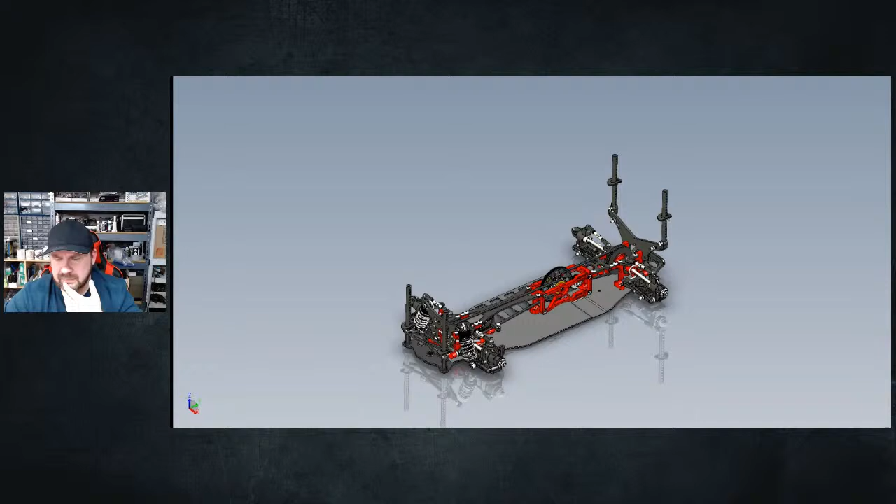Today I'm going to show you the prototype from before I started. I think it was 2008 that I started running for T.O.P, and I don't remember the name of the car that we started with, but that's what we ran at the Carpet Nats in Omaha. I wound up blowing up a lot of rotors in modified and finished last, I think.

And the 13.5 went well, and we wound up TQing and winning that. This car was some CAD that they had sent me after that race. I don't remember exactly when it was, but I know we were at a race talking about it, and Vincent and EJ were there, and they sent me the CAD model to check out.

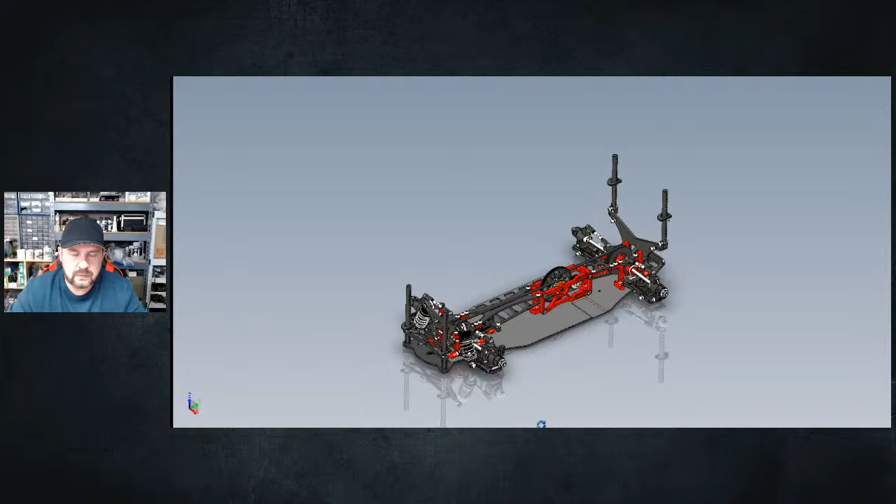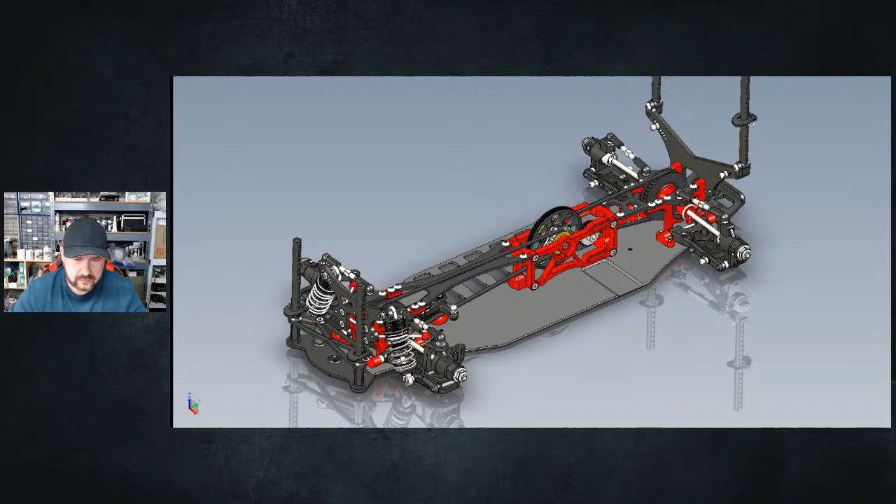I have to apologize, my normal Spaceball doesn't work with this e-drawings format, but this is the only format I have this in. I don't have this in a CAD model, so I can't upload it. Like I said, this is a prototype that was never made, but this is kind of the precursor to the Photon. Actually, it's kind of funny that it looks more like the cars do today.

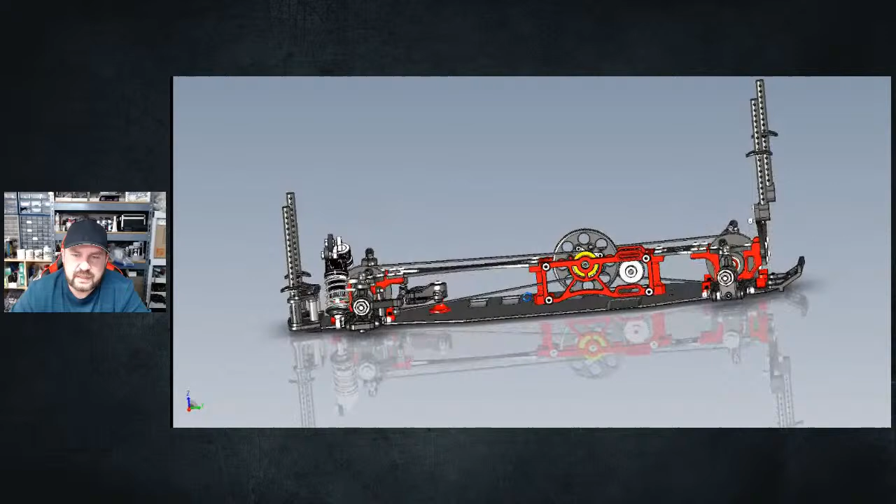The one problem we had with this car at the time was because of the way this whole center section was made. Mind you, I went through this CAD and assigned all materials and everything, so we could get a pretty solid estimate on what the weights were. The one problem with this car was with this giant mid-motor mount type setup, it was extremely heavy.

Also, the other thing we were looking at is it covered a lot of area for flex, so the car was going to be pretty stiff.

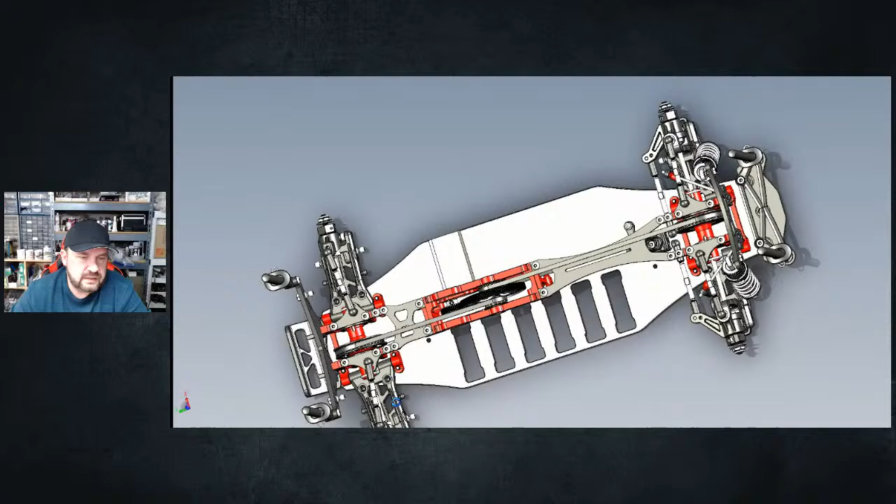But you can see a lot of common things, like the style the suspension arms were made out of, front and rear. I tried to emulate that when we designed the Photon. They really wanted a single crank, even though I had pushed pretty hard for a dual crank system, which is kind of funny seeing that everybody's going back to it now.

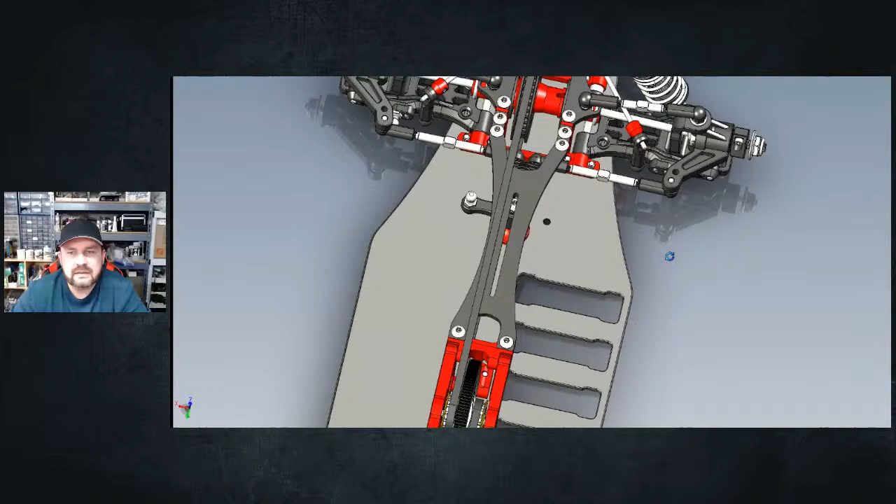But again, you can tell it's an older car style. The servos were being mounted the opposite direction compared to today's cars. I also had the style with the shock towers on the opposite side of the shocks compared to most cars, just to open up some of that area. But there were small things, like only front wheelbase adjustment, no wheelbase adjustment in the rear, just a bunch of little stuff.

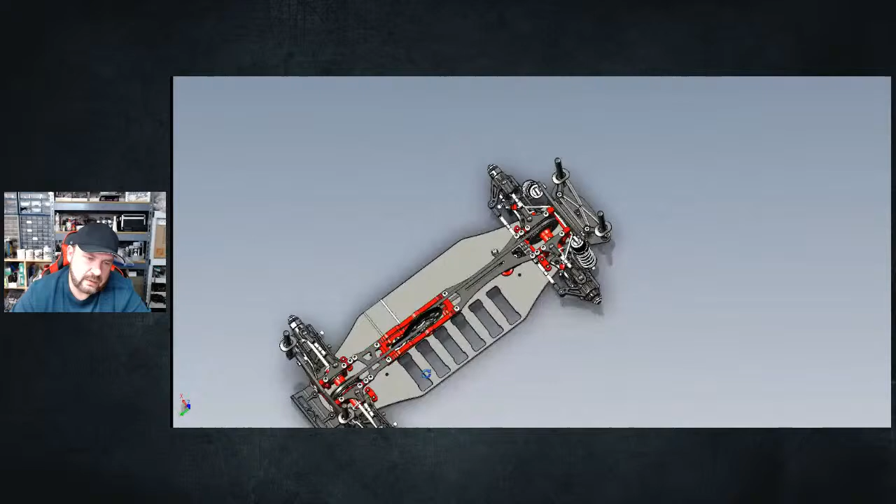So as we discussed it, they decided to have me redesign the car, and that's kind of where everything progressed from there.

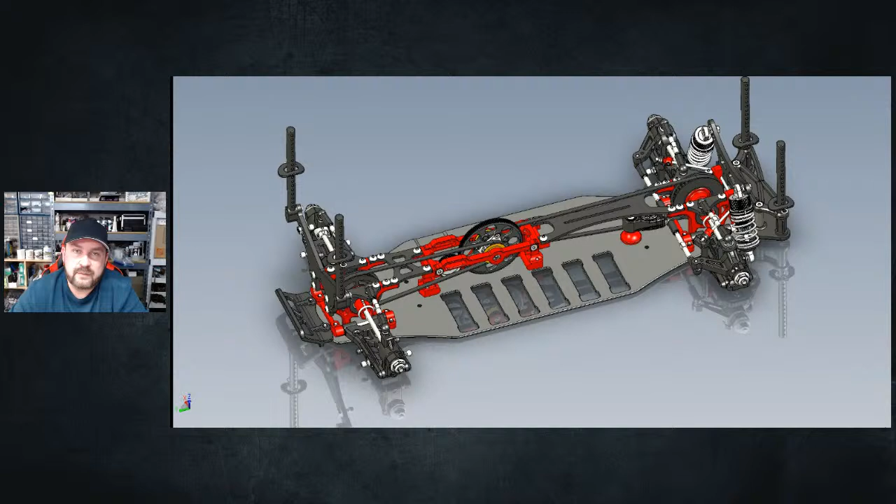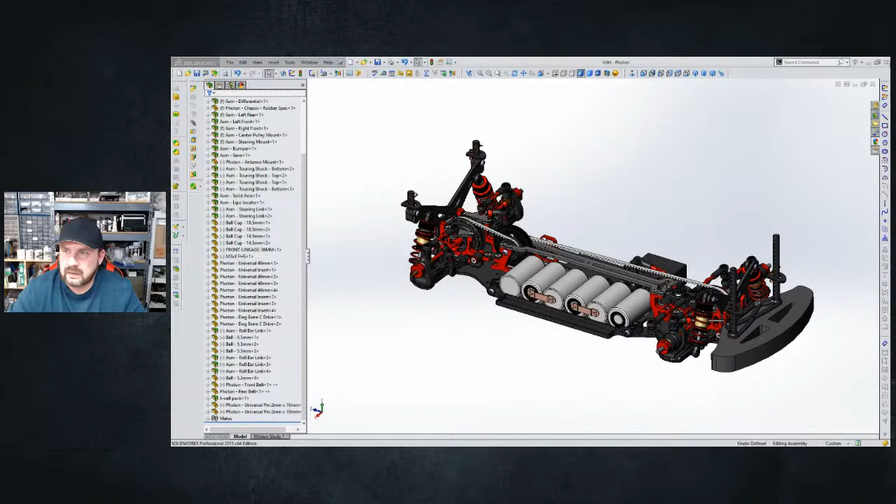Let's see, I'm going to switch over now to SolidWorks. All right, so this was the original Photon. I'm going to close this one too.

The deal behind this is you can see the previous car. The main thing I basically did was take that previous car, and at the time we were still using round cells, Lipos were just starting to come into the mix. But the big thing is that we were still split on tires. The US was still racing on foam tires at this time, where on asphalt we were running rubber tires, but the rest of the world was on rubber tires. So this was kind of a hybrid car, if you will, to try and give us something to race both, to where we could have success in both areas.

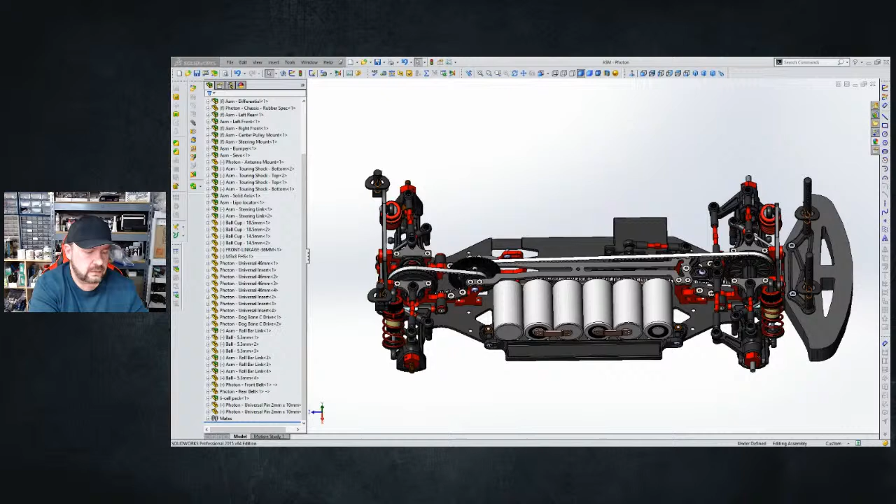And the first time we actually got to run production cars was at the Reedy race. I think E.J. Evans wound up winning, I think it was USGT. He sent me a note on what it was, it was 13.5, and I think whatever they were calling the USGT class. So we had a really good outing.

I had some decent races. Actually, it was kind of funny because one of those popped up in my YouTube feed the other day where Lemieux crashed at the beginning and Howard and I beat on each other, and he caught up and beat us on the last lap. Pretty funny looking back on everything that long ago.

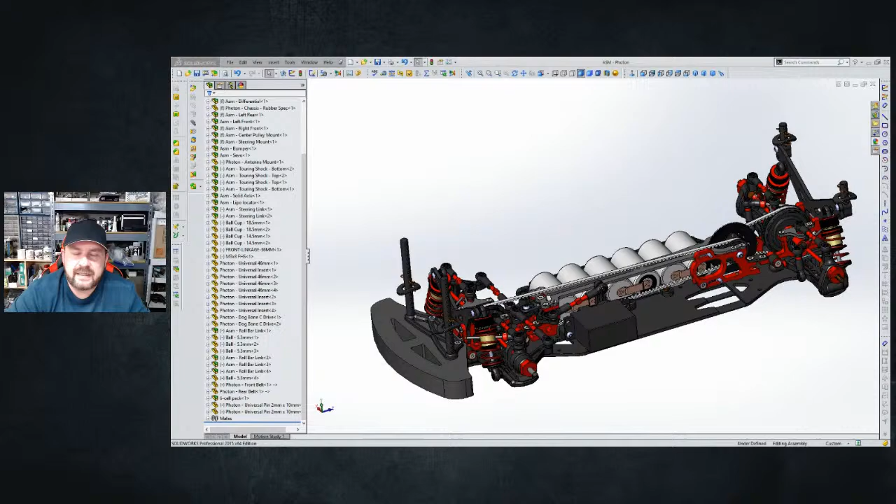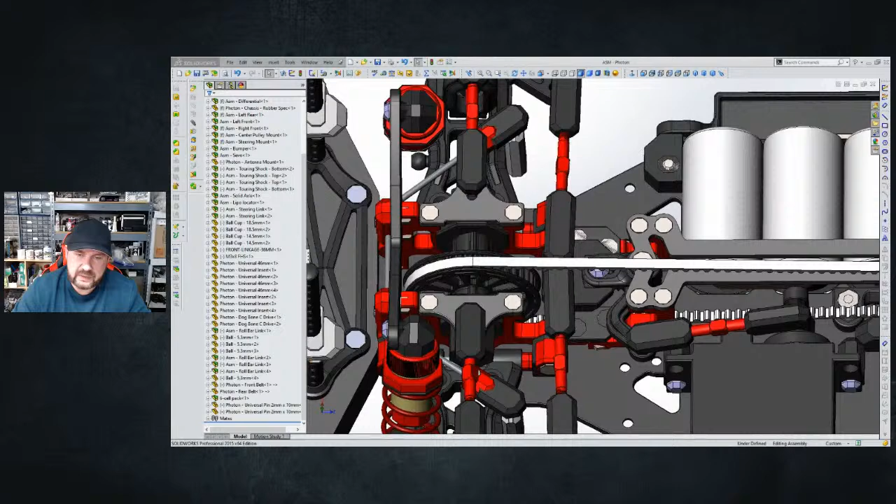At the time, we had gone away from the other style suspension mounts and went more the X-ray direction, which was so popular for carpet racing. We were trying to cover a lot of the chassis with bulkheads and optional pieces, to where we had these two small separates, and then one that would join, and one that would join and come out with ears to stiffen the car for foam tire racing. So we were trying to have a bunch of those options.

This whole weight tray wasn't used for round cells, but we were using them for lipos to be able to drop some weight in there to balance the chassis, at the time.

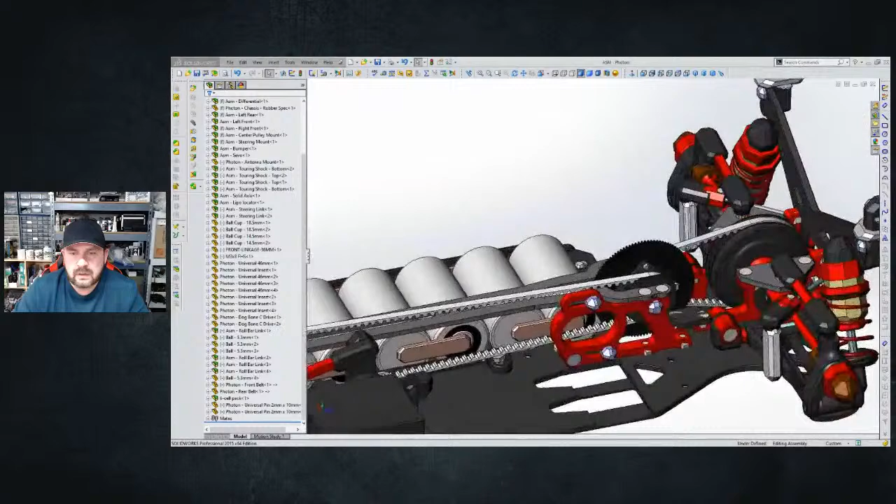Of course, ball differentials with the sealed up snap-on covers.

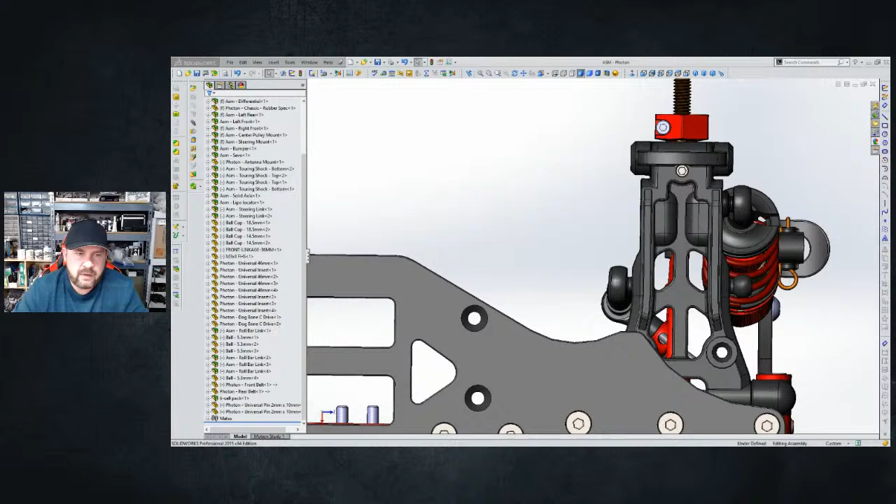I wanted to do the rear arms and hubs a little bit different to make them stronger, because everybody was taking this back section of the arm and having to scallop it to tuck the rear suspension arm, or tuck the shock in, so we weren't dragging on the rear wheels. So I kind of inverted the hub and the rear suspension arm trying to make space, so we could still have a nice, stiff, solid suspension arm, but narrow it all up so we had more room in this area, so we weren't hitting the inside of the foam tire rims, where we always were grinding grooves in the shock cups.

So that was pretty much the gist of this car. This car got ran. I had a prototype for maybe 8 months or so. I went over to a Hong Kong charity race where we ran over there.

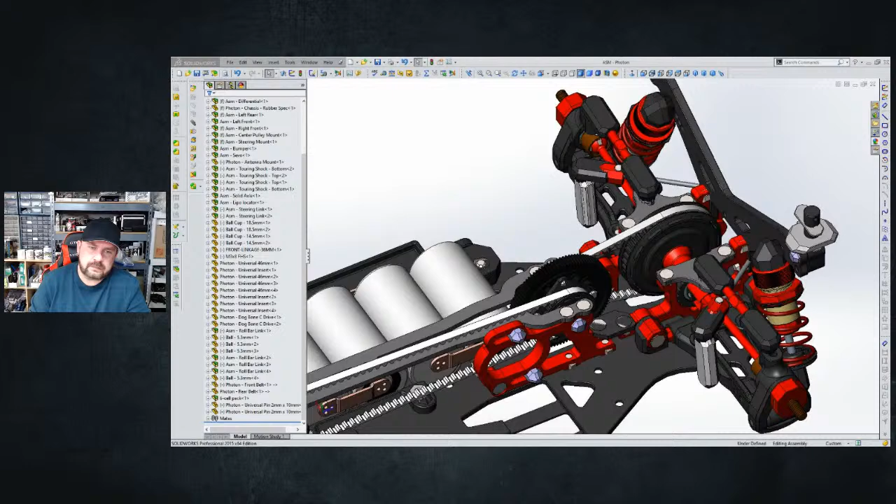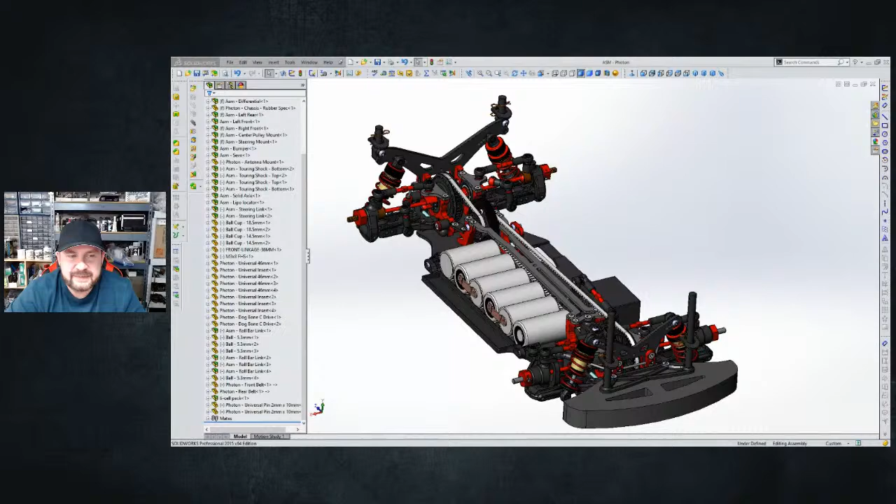I think Hanulik and a bunch of the guys started running it here in the U.S., and that was my first meeting with Hanulik and a bunch of the other guys there. I don't know why I'm drawing a blank on some of the names, but I'm getting old, so it is what it is. But that was pretty much it.

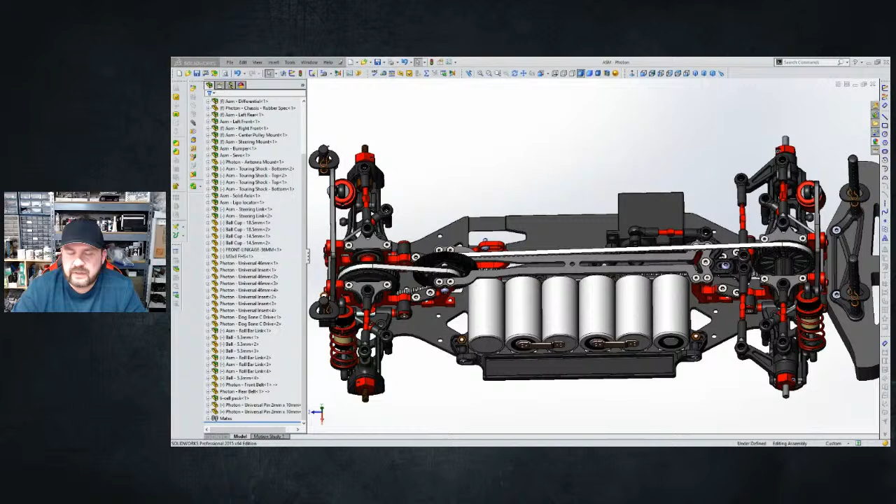So this was kind of the first version of everything. Looking back on it, it's pretty funny to see how much things have changed. This at the time was pretty standard, I wouldn't say run of the mill, but it had a bunch of different stuff on it, fairly typical for a touring car. Now they've changed a ton, obviously, in the last 13 years since I drew this.

So this car was at this point when we started production, and we had run for a little while, and I actually have 2 other versions of it. There was another car that I had already started working on. By the time this got out and people were running them, I had already worked on a second version, an Evolution 2, with a bunch of tweaks and changes, trying to further improve the car without making massive changes.

And that car is more a mix, I would say, of a pretty good selection of option parts. So that was one of the things I had.

If I come back into my files here, we had a ton of different option parts with some different chassis, all the different weight plate sets, some of the lipo weights that we had made. I even drew up front one ways, and then just a bunch of different aluminum hub carriers, steering blocks, kind of the adjustable body post cap, like the one we made for the 12 scale car, but made for the touring car size post and pin, so a little bit bigger. I don't think that was ever made. Some of this aluminum stuff might have been made at some point.

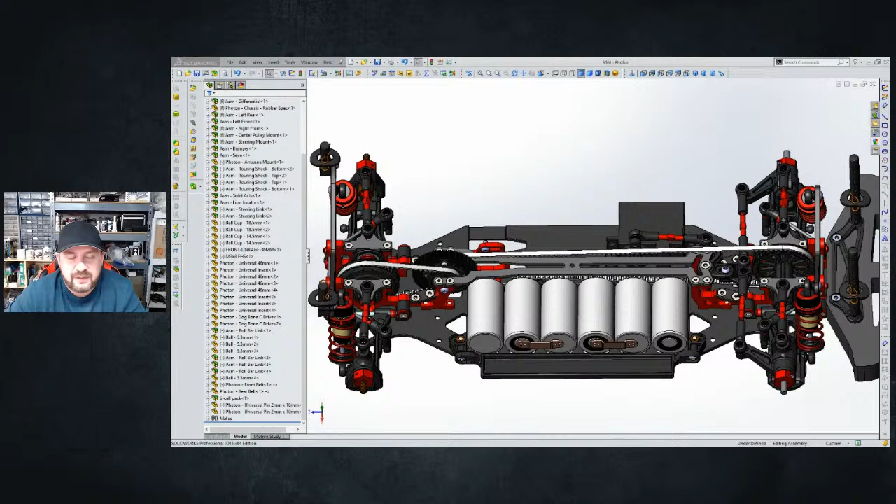So I was always big on wanting to play with rear universals and dog bones and things like that, trying to get more rear traction. But everybody just kind of runs these standard style universals now. Some other interesting things, let's see.

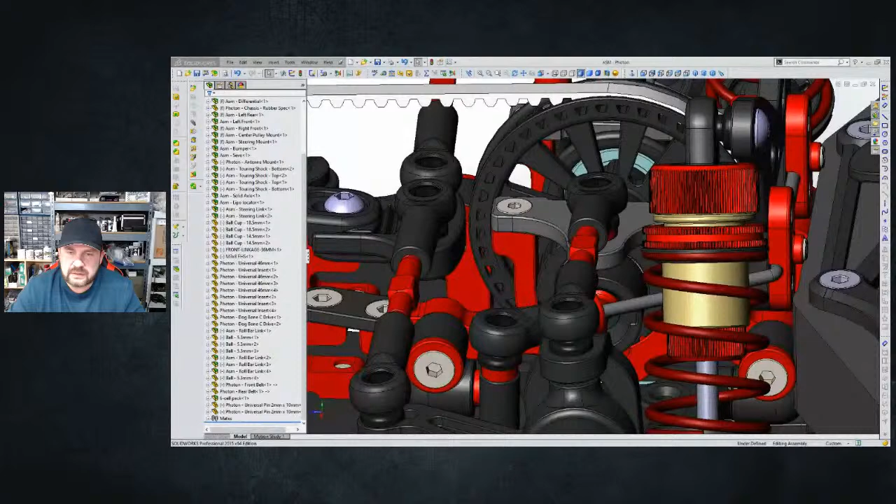We're going to go into this.

So a long time ago, my dad and I started messing around with making different pistons. I know you guys have seen a ton of the off-road pistons where they have 6, 8 holes, whatever. My dad had actually machined shock pistons for me that were the standard thickness, but they were the exact size of the body.

What we started doing then was, instead of drilling holes, we tried to do like the old Delta 12 scale shocks or some of those, seeing what would happen if we did the math on the volume and started making the pistons really small. We were trying to get the correct amount of blow-by in the shocks to mimic having 3 hole, 1.0 or 1.1 pistons.

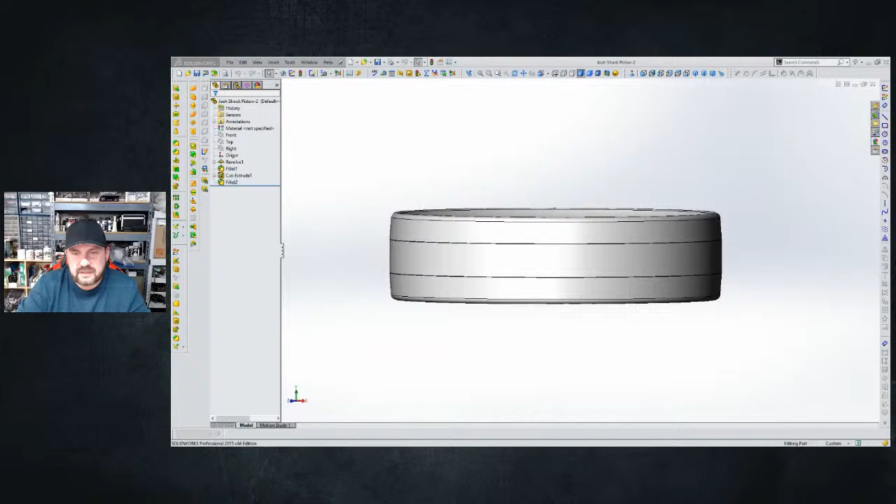One of the interesting things is that they were super inconsistent, terrible. So instead of a standard piston, you can see how recessed this is — this is actually much taller than a standard piston. So what we did was put a slight taper on it, and we made the center section of the piston a lot tighter to the body than a normal piston.

Generally with a 10 millimeter bore, you would have a 9.9 millimeter piston. The way these were designed was to be a 10 millimeter bore with like a 9.95, so that there was less blow-by, and the shape of the piston was working to control more of the oil and force it through the holes.

He hand machined me some, and they worked really, really good. I ran those pistons for maybe 4 or 5 years, through all my top cars and into other cars even, and also in some of my gas car stuff.

So I always really liked this. They were really consistent. I've seen some companies do some things like this, some haven't, but I've always been a fan of this. I even made some of these for my eighth-scale off-road car when I ran a Gamma for a little bit and was playing around with that.

It made a massive difference jumping. So for an off-road guy that was always having trouble making jumps or making some of these big triples or quads, I made some pistons like this for my eighth-scale off-road car, and I actually ran them at a Bill Bridges benefit race. I went from shorting this tabletop jump in front of the driver's stand to jumping about 15, 20 feet past it the next day.

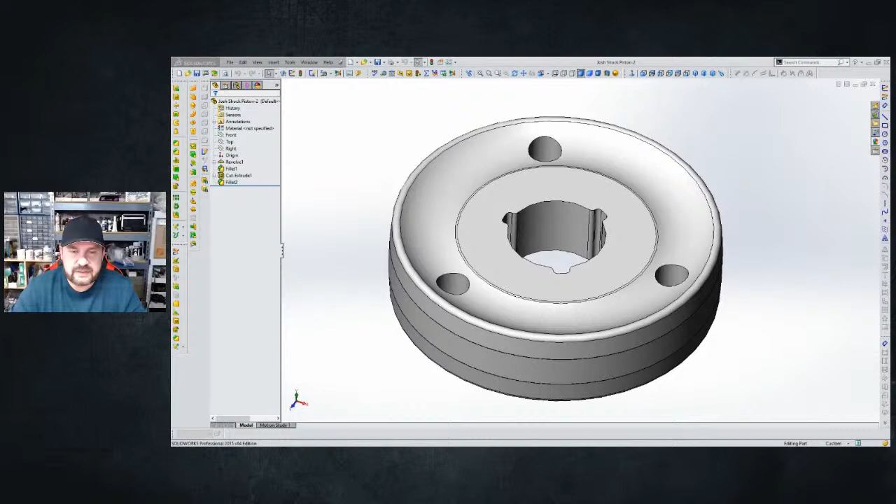So they make a pretty good difference as far as making sure to force the oil through, and adding a good amount of pack if you don't actually end up drilling a little extra volume for the piston holes. But that was one of the unique things.

Unfortunately, instead of making these a machined piston, they molded them in the kits, which meant they weren't very round, so they had to decrease the outer diameter because the tolerancing wasn't good for them to fit. That was kind of a bummer in the whole deal, that they weren't actually able to work.

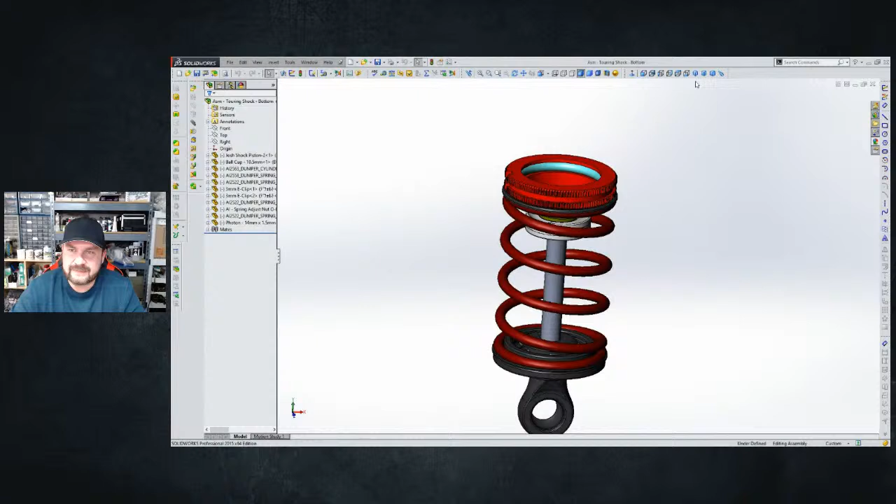At the time, we weren't sure of shock spring sizes, so we had made these collars so we could run both the 13 and 14 millimeter inner diameter shock springs. I think now everybody has gone to 14s, and maybe the big bores are even bigger than that. Well, they should be the same.

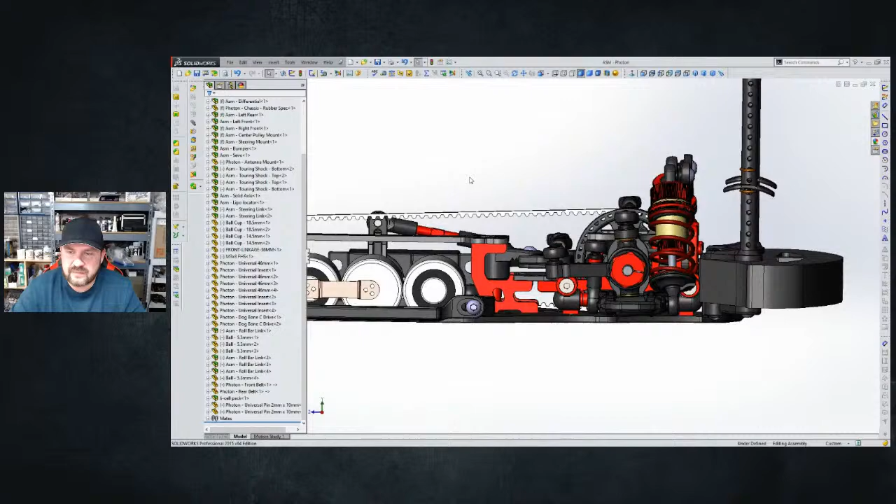But that is pretty much it for this one, I think.

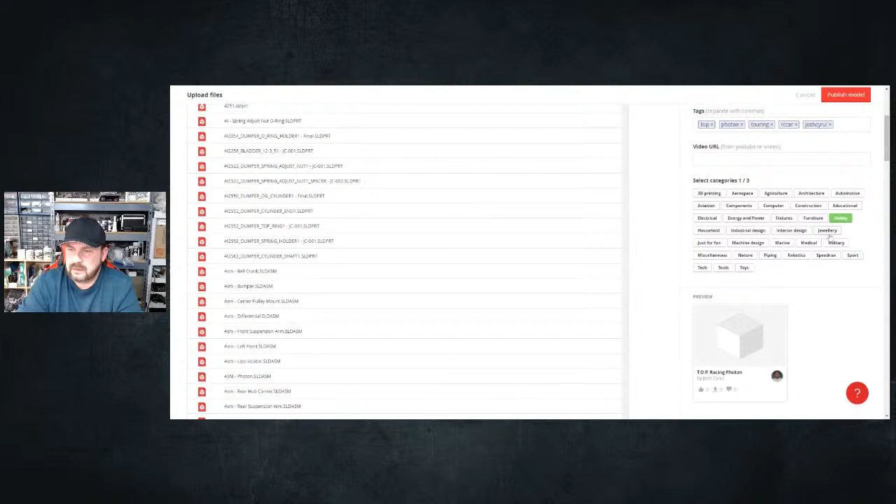And then I'll add the URL and some other stuff in here. But I'm going to go back through and fix the gallery and that stuff, because it's obviously going to upload all these parts into there, so I need to strip some of that out.

Yeah, no problem, so I'll do that. I don't know, I'll do maybe the Lithium first and just go in order, or maybe the one before that. So maybe we'll just go with the C12, and then I'll just go right in order with all the oval cars. With all these other ones I'm kind of jumping all over the place, but maybe I'll just do the oval cars in order.